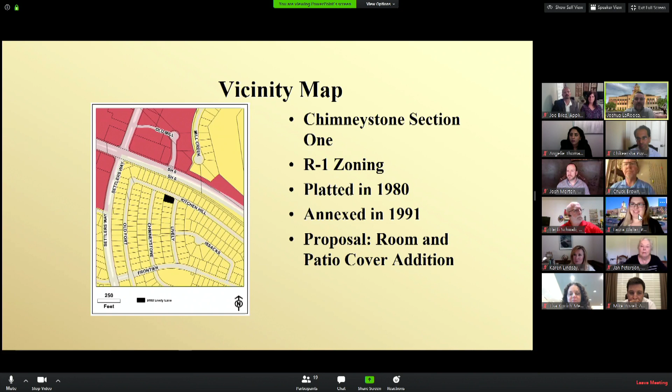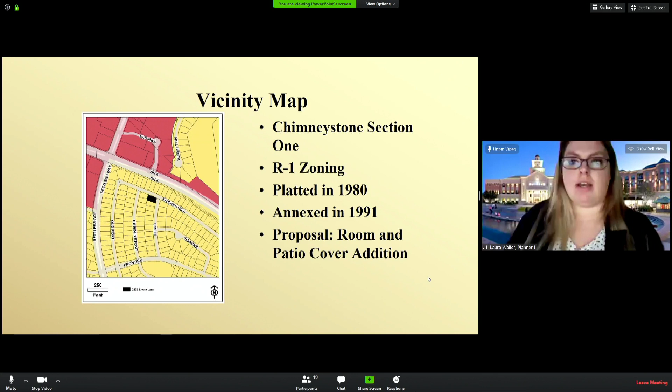Yes. Okay, we're working now. So a little bit of technical difficulties with this different situation, but we're going to start with a special exception. This will be for side and rear lots. We've seen some other special exceptions in this area. It is Chimneystone Section 1 again, and it is currently R1 zoning, but we'll need to come forward for a rezoning to R1Z in the future. Until then, if we get additions, we are taking them through this process in order to get the side yard alignment corrected. So this was platted in 1980 and annexed in 1991. And the proposal is a room and patio cover that would align with the zero lot line portion of the yard. Next slide, please.

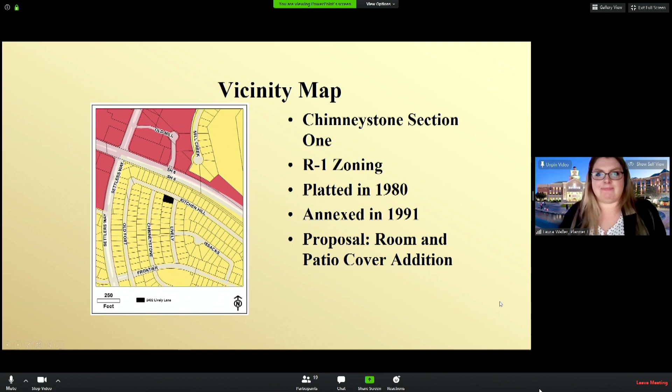So a little bit of an overview: the recorded plat established a 0-foot side on the left, and as part of the zero lot layout, R1 zoning requires 5-foot side yard and 15-foot rear yard. The room addition that would align on the zero lot line side is proposed to extend to 8 feet from the rear property line rather than 15. There is also an existing 10 by 12-foot shed that is encroaching on the street side yard setback. But in order to comply with regulations, the owners have elected to remove that shed so they can move forward with the special exception. So the special exception would allow the addition to be built at the 0 setback and to 8 feet for the rear yard as written by the utility easement on the plat. Next slide.

So this is a site plan of the area. As you can see in the back, there is the 8-foot utility easement. The house is sited on the left side of the lot, and this is a street side corner, so you can see the street side on the right side. There's a dashed square kind of midway up — that is the existing shed that is proposed to be removed, and that will actually be one of the conditions. So there's an additional condition on this site to remove that shed. So this is the plot plan. And next slide.

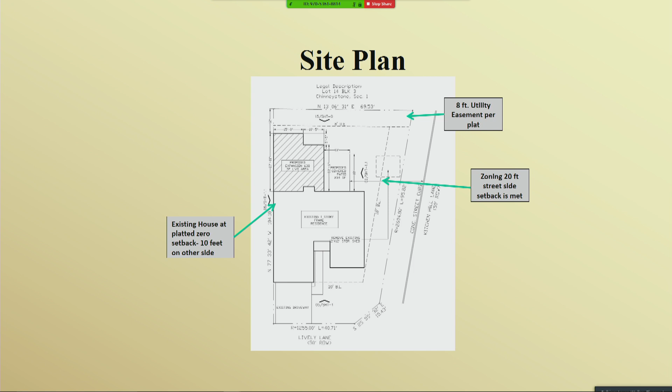Here you can see a couple of elevations. They have proposed to match the siding to what is already in existence. There will be a room addition on the back side, as well as an additional patio cover, all to match what is already there. Next slide.

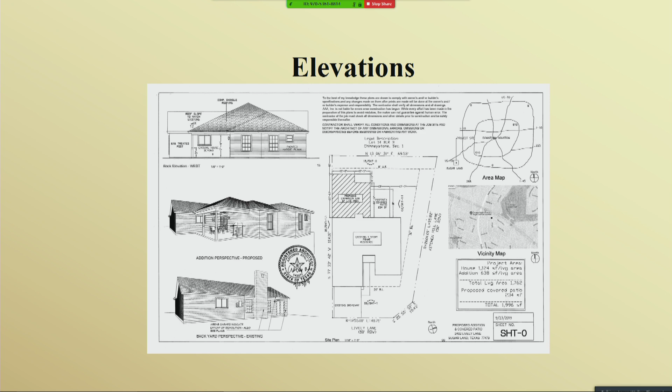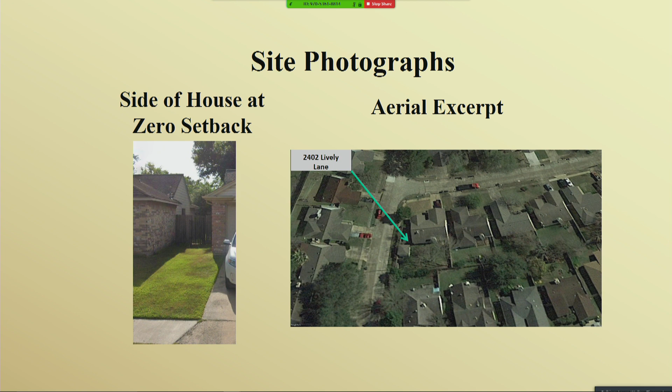Site photographs. This is a view of the home at the 0 lot line side. And then you can see we have a Google excerpt that shows the rear yard of the existing home. So you can see the little shed up on bricks, and then the chimney at the back that will be removed in order to make room for the room addition there at the rear of the house. Next slide.

An aerial analysis of the neighborhood. This does appear to be architecturally compatible with the neighborhood. There are 4 nearby homes that do not appear to meet the 15-foot setback. And as mentioned earlier, every home in the nearby area does not meet that 0 lot line, the 5-foot side setback, because it was incorrectly zoned at the current time.

So there are 7 approved similar special exceptions. You saw one at the last meeting as well as maybe the meeting before that. They're not pictured here in this map because it is part of the larger area, but you have approved 7 similar exceptions. Next slide.

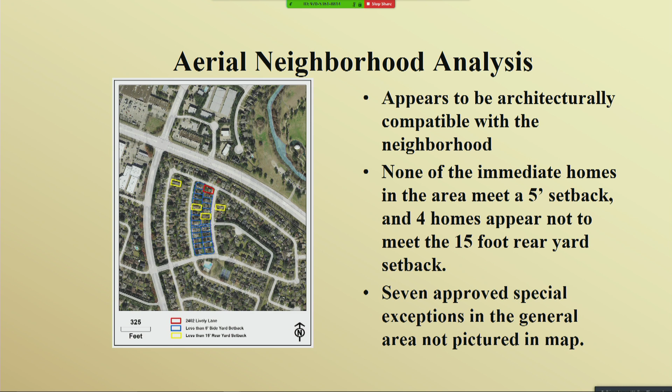This does meet the first 3 standard criteria. It was platted before it was annexed, and the recorded restrictions are less restrictive than the zoning restrictions. And the special exception would not be less restrictive than what was recorded. As far as public welfare, there do not appear to be any issues with detriment or compatibility. Next slide.

The public hearing requirements were all met. Mailers were sent out to property owners. The HOA was notified. There was an online form available, as well as some special circumstances with COVID. We did allow emailed-in forms as well as some extra phone calls. However, we only received 1 general inquiry by phone, and staff is not aware of any opposition. Next slide.

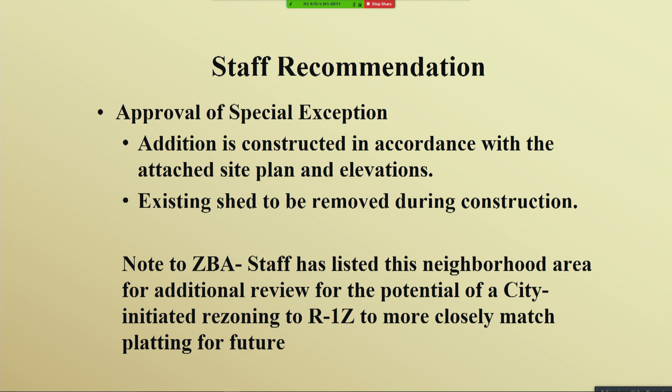Therefore, staff is recommending that the addition be approved as long as it is constructed in accordance with the attached site plan and elevations, and also the condition that the existing shed will be removed during construction. You will now have the public hearing, and there is an applicant representative available to answer any questions from the board after the public comment closes.

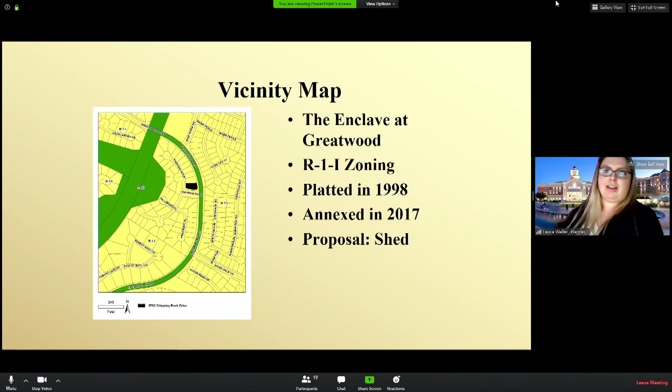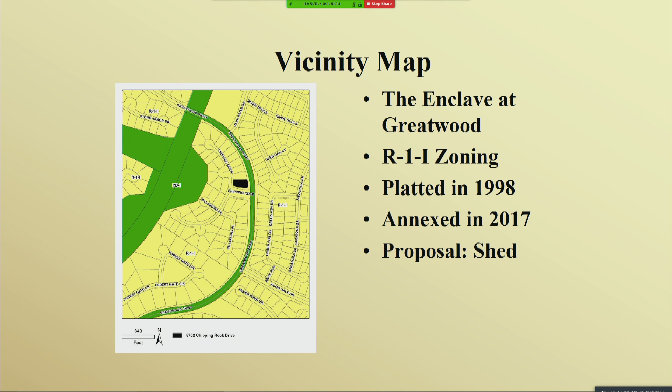Okay, just to make sure that we're all clear, so this is in Greatwood, the Enclave Greatwood specifically. You can see here on the map in black, that is the lot in question. It currently has R1I interim standard zoning, which would require a 5-foot side yard setback. It was platted in 1998 and annexed in 2017, and the proposal is a shed in the side yard.

Next slide. A little overview of the case - this is a little bit different than what we normally see. This applicant actually had to get a special HOA approval in order to be able to put the shed in their side yard. It has since been recorded at Fort Bend in the county clerk, making it the most recent recorded restrictions. So this specific shed, and only this shed, is going to be allowed to be built across that 5-foot line according to the city.

So the shed is proposed to be placed at the side of the house, and it would be 1 foot from the property line and 1 foot from the house, so in between. In order to meet those 1 foot requirements, building safety does require that the shed be firewalled on both of the long sides, the sides that will be only 1 foot from the house. So the special exception would allow this shed addition, only 1 foot from the house, 1 foot from the property line, as allowed by the newly recorded restrictions from the HOA. Next slide.

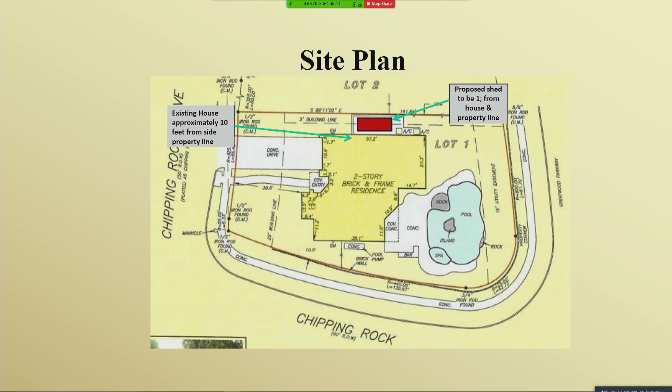So a site plan showing approximately where the shed will be. There is an existing concrete pad on which the shed will be placed. The house is approximately 10 feet from the side property line, and the shed is 8 feet by 16, so it would sit centered about 1 foot from the house and 1 foot from the property line.

Here are the elevations and specifics on what exactly the shed will look like. This is what was the allowed obstruction, and it is recorded with the county clerk's office. So this specific shed and only this shed would be allowed, and it does specifically mention that sides B and D, the long sides, would have to be firewalls.

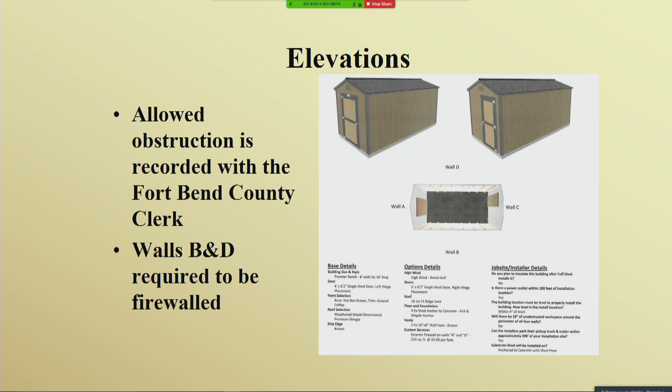Aerial neighborhood analysis. Again, this was taken from Google Images, but you can get a larger picture of the area. We do have nearby homes that meet the 5-foot side yard requirement. None of them appear to be over that 5-foot side yard.

There are 3 approved special exceptions nearby, but again, those are for rear yard setbacks, not side yard. The HOA did require the neighbors to give approval of the shed before the new restrictions could be recorded, so the neighbor would not have an issue with having this shed in the side yard. That was required by the HOA before this even came to the city.

However, there is a question of compatibility because there are no homes nearby that have a shed in the side yard. Any existing sheds nearby are in the rear yard. So that will be up to the board to make that decision on whether it is compatible or not.

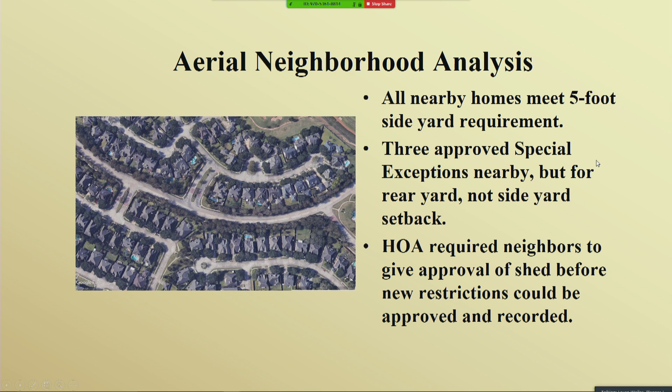It does meet the first 3 special exception criteria. It was platted prior to annexation. The recorded restrictions are less restrictive than zoning, and the special exception would not be less restrictive than what is recorded. As far as detriment to the public welfare, that is up to the board to decide.

City staff did not see any apparent issues. However, you would have to decide amongst yourselves if you think this shed is compatible with the area or not.

The public hearing requirements were all met. It was posted online in a newspaper, and mailers were sent out to property owners as well as the HOA. There was an online form available to provide comments. However, staff received no inquiries and is not aware of any opposition to the special exception.

Therefore, staff does recommend approval of the special exception with the condition that the shed is constructed in accordance with the site plan and elevations that are provided here. Staff and the applicant are available to answer any questions from the board after the public hearing closes.

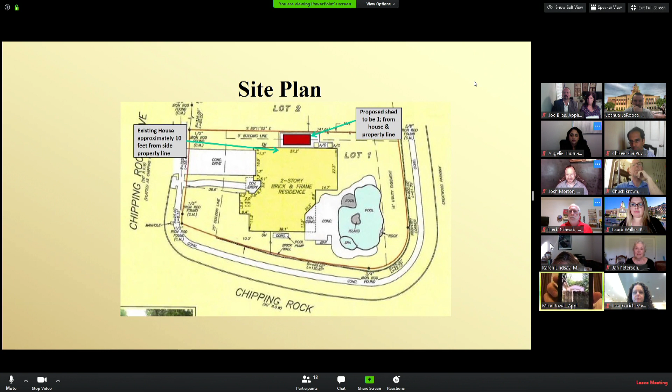That's actually something I proactively brought up to the HOA when trying to get approval on the shed first. I even mentioned I'm willing to do anything they need, whatever the stipulations are, I have no choice but to agree. I said if aesthetics is an issue, I'd be happy to put something in front of it. I don't think it's necessary though, since you only see a small portion over the fence line, and the colors we got approved closely match the house.

There's also an existing tree with a lot of foliage, not an oak, so I really don't see it as an eyesore. I know that's subjective, but I don't see it being an issue. That said, I'm still willing to do that if needed.

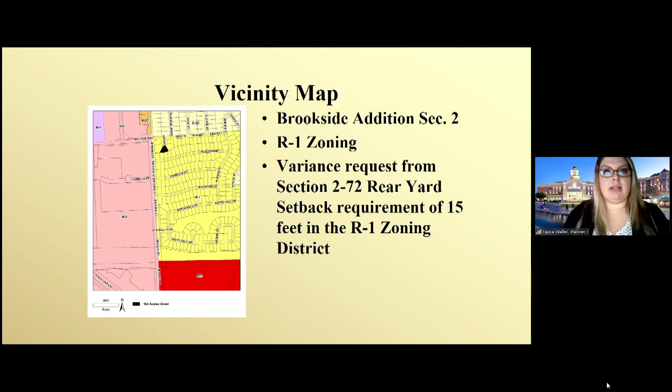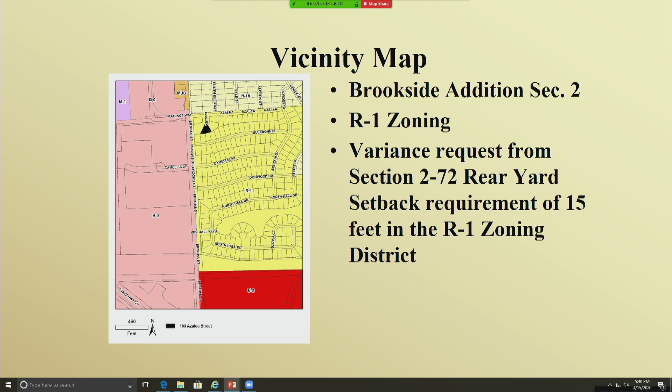To discuss the specifics of this lot, this is part of Old Sugar Land. It was part of the original city limits when it was incorporated in 1959, and was then platted later in 1965. That makes it not eligible for a special exception — it has to go through a variance because of the order in which it was platted. The variance is a request from section 2-72, the rear yard setback requirement of 15 feet in the standard R1 single-family residential zoning.

A case overview: as mentioned, this is located in part of the original city limits of Sugar Land, so it does not qualify for a special exception. The recorded plat established a 10-foot rear yard setback, whereas the zoning setback is 15 feet. The house as it stands meets both setback requirements — it's actually closer to 20 feet from the rear yard. The addition will comply with the platted restriction of 10 feet, but does not meet the 15-foot rear yard setback for zoning. The current 15-foot setback requirement was put in place as early as 1982 and has continued in all subsequent ordinances, even as zoning has changed. It's remained 15 feet.

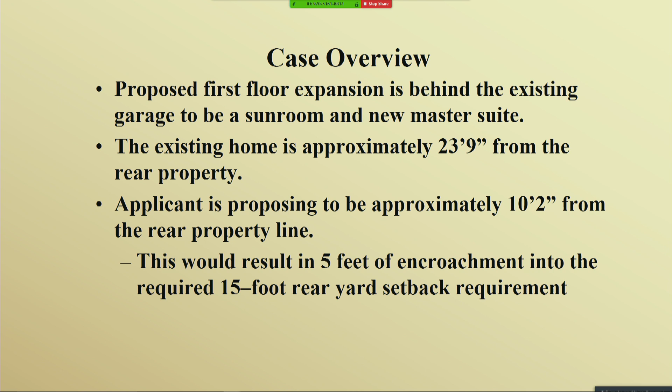The proposed first floor expansion is behind the garage, proposed as a sunroom and a new master suite. The existing home is about 23 feet 9 inches from the rear property, well outside the 15-foot setback. The applicant is proposing to be 10 feet 2 inches from the rear property line, which results in 5 feet of encroachment into the required 15-foot rear yard.

This is a survey of the existing conditions. You can see the house there. It's a fairly large lot, but it's a cul-de-sac lot, so the odd shape is a little different — it meant the house had to be set back 41 feet to fit across properly. But the house as it stands is 23 feet 9 inches from the rear property line.

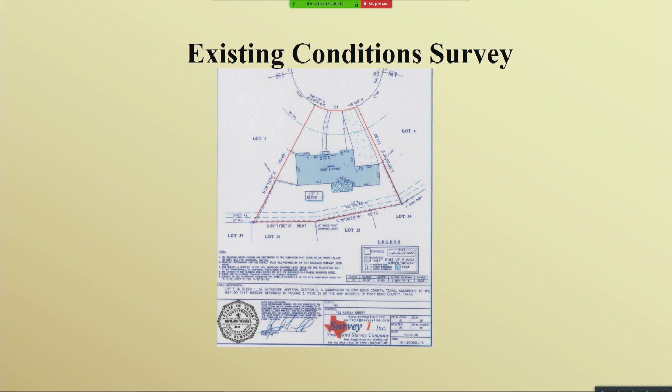This is the proposed plot plan. You can see the existing house in white, and at the bottom on the right side where there are dashes, that's the new addition where the sunroom and master suite will be. On the other side, you can see a different symbol — that's a proposed paver patio and pool that would be there.

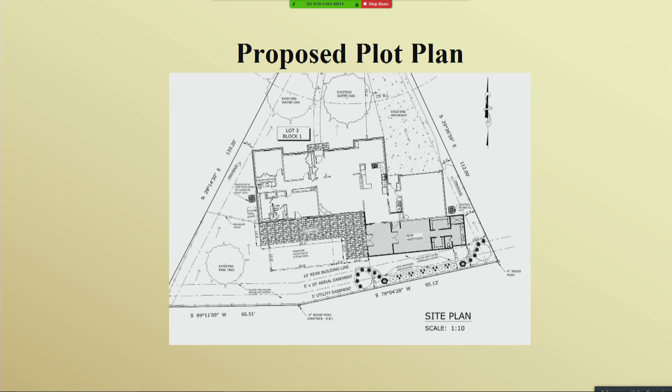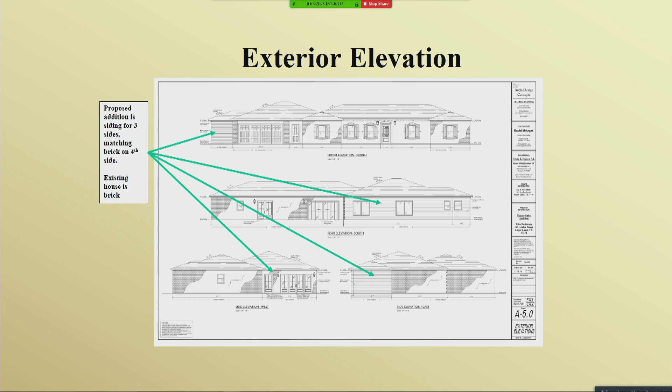These are the exterior elevations. You can see the addition from the front just a little bit on the far left side of the top elevation. The other elevations show the siding proposed is Hardie siding, with brick where the windows are and where you can see it from the pool, but from the street and the rear of the house it would be siding.

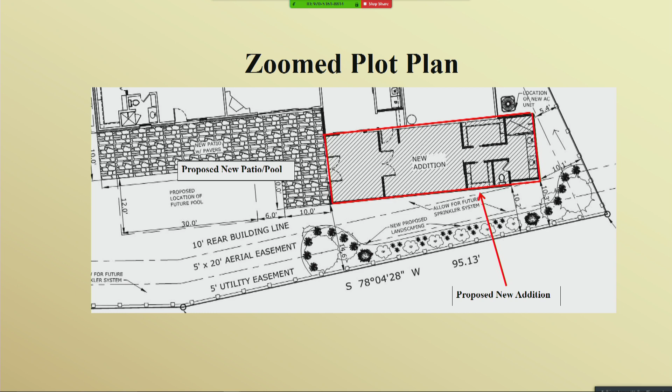So this is a zoom in of the plot plan, just so you can get a better idea of exactly what they're asking. The red box is for the addition, and that is what the variance is for. It is proposed as a new master suite, so a sunroom that would then lead into the master suite off of the kitchen and behind the garage. It would be about 10 feet 2 inches or 10 feet 3 inches, depending on exactly where you measure it from the rear property line. Next slide.

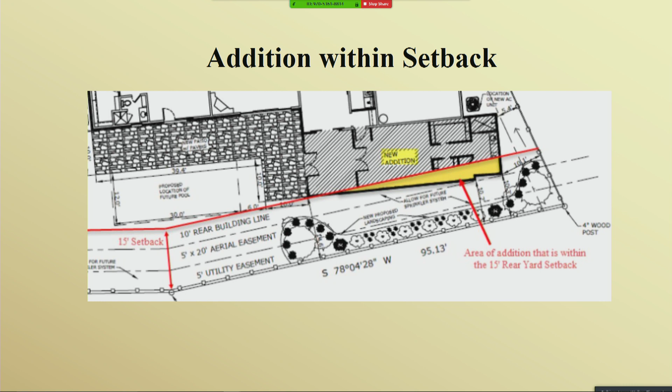This is taken from some material that the applicant did provide from their architect. You can see here in yellow, that is the area that encroaches. It's only about 116 square feet that does encroach, so it's a very small adjustment. I believe it's about 17% of the entire addition that is in the setback. It will be up to the board to decide if they should maybe change their drawing or allow that small encroachment. Next slide.

So some specifics of the case. The addition is proposed to be 663 square feet, and about 116 of that is encroaching. The applicant does believe that special circumstances are the shape of the cul-de-sac lot and the position on that. The house is 41 feet from the front property line, and 25 feet is the required setback by plat. So that is 16 feet further than would be required.

However, I did do some math and some research, and the average depth of the lot, if you take off that front 16 extra feet, would still meet the 110 foot minimum depth. So even if you take off that extra 16 feet that the house is set back and is maybe considered wasted space, it would still meet all of the setbacks and size minimums of the lot for the R1 district. This extra front yard that is buildable area, but is also wasted because it is in the front yard rather than the rear, is about 885 square feet, or 7.49% of the entire lot. So it's not a very large portion of this lot that is wasted there in front of the house. Next slide.

So this is the form and the measurements that I took using the scale and some of our renderings that were given to us. This came from the survey and then using the scale from the survey. You can see that front portion there along the curve that says 885 SF, that's square footage — that was what I was considering the wasted space. Then I measured 25 feet from the front of the house out, so that would be the new front curve, because the house does have a 25-foot build line that was platted. I took the measurements from either side from that 25-foot-in-front-of-the-house measurement, and it does still average out to be exactly 110 linear feet of depth of the lot. Next slide.

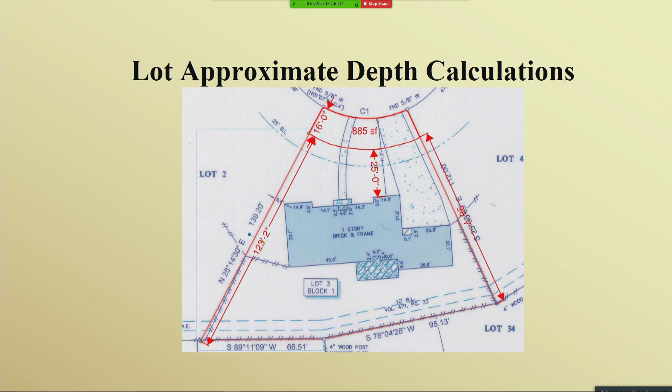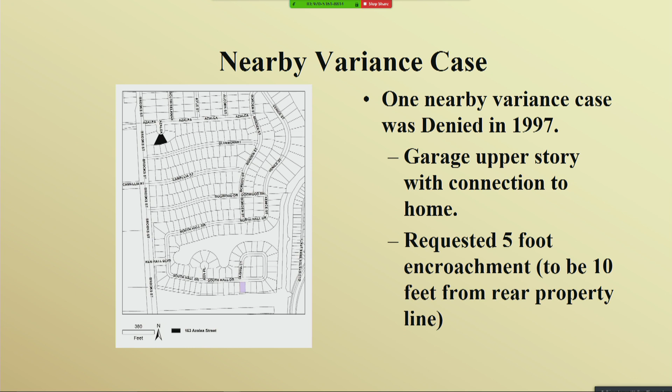There is a nearby variance case. It's similar in that they requested a 5-foot encroachment so that they could be 10 feet from the property line. However, the lot layout for this was different. The garage existed at 10 feet from the property line, and they were requesting to build a second floor above the garage and then connect that to the home, so that the garage and this new portion of the house would be encroaching into that 15-foot setback. It was denied in 1997. Next slide.

So the public hearing requirements were met. There was an online form available to provide comments in advance of the meeting. We did receive one of those earlier today, so that will be read during the public comment period. Aside from that, no other inquiries were received, and staff is not aware of any opposition to this variance request. Next slide.

So the variance criteria: in order to grant a variance, the board will have to have a unanimous vote because there are only 4 members since Joshua had to recuse himself. So they will need to find that the variance is not contrary to the public interest, that there are special circumstances or conditions that apply to the land or building for which the variance is sought, that literal enforcement does result in an unnecessary hardship, and that if granted, the spirit of the ordinance is observed and substantial justice is done. Next slide.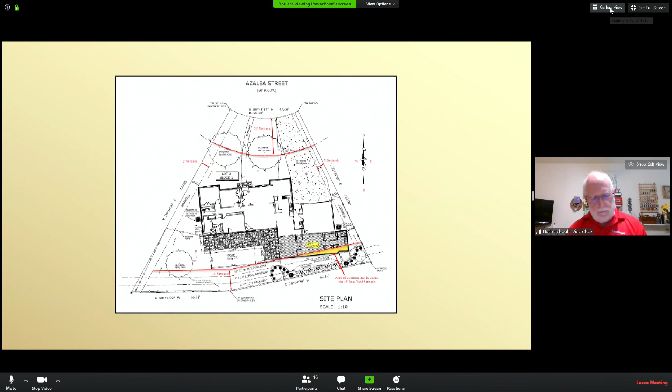So this will be presented by the applicant. I would like to introduce them, and then they will need to be sworn in before they can give their presentation in the following slides. So Mr. Biles? Yeah, ready to be sworn in. Okay, Mr. Biles, do you solemnly swear or affirm to tell the...

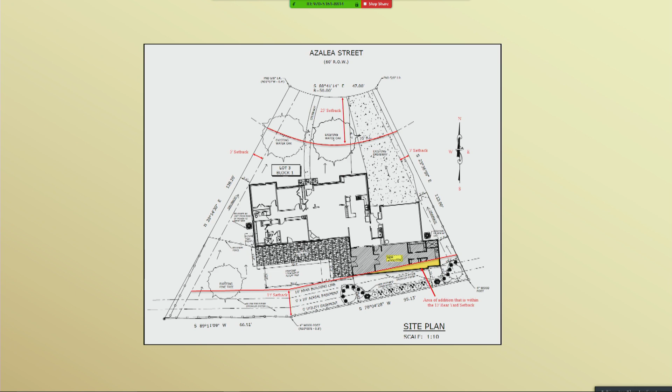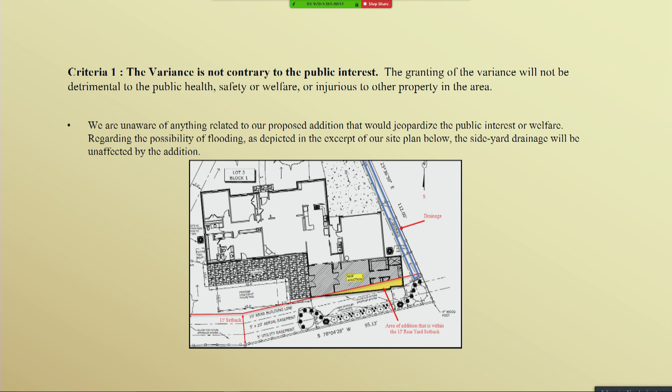So I read ahead and found out the 4 criteria to meet, and I'd like to address each one of those. The first criteria is the variance is not contrary to the public interest. We've been kind of racking our brain as to how this would be contrary to the public interest. The only thing we come up with is possibly flooding. We assured that we are going to get gutters, and we're going to direct the water down our driveway or the designated drainage area as you see in our plat map there. So you can go to the next slide.

The second criteria, there are special circumstances or conditions applying to the land or the building for which the variance is sought. We believe we meet both the special conditions to the land or the lot size and special considerations to the building as well. Regarding the special conditions to the land of the lot first, you can see right there the area, 4 or 5 blocks surrounding our home. We are the only cul-de-sac in those neighborhoods represented there.

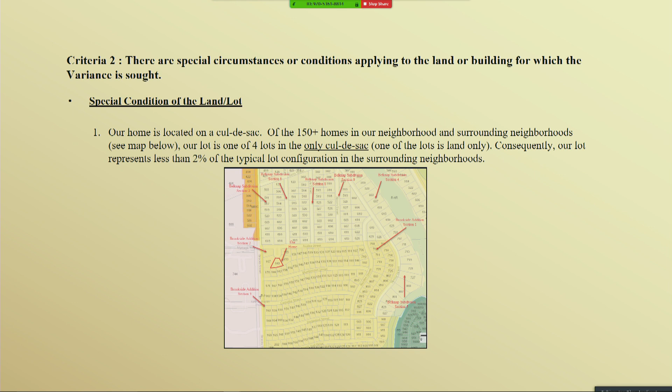On the cul-de-sac, there are approximately 5 homes. Technically, one home actually faces Azalea Street, so I question whether it's truly on the cul-de-sac. There are really 4 homes that have the odd-shaped lot symbolic of cul-de-sac lots. Taking all these homes into consideration, it's a very unique situation being on a cul-de-sac, and taking all those neighborhoods into account, it represents about 2% of the typical lot in those areas.

As Laura mentioned, we do have a 25-foot setback from the street, but there's special consideration. Even in this case, the writers of the law recognize that cul-de-sacs are unique, so they granted a 20-foot setback that the buildings need to be backed up against.

My primary issue is that because the home wasn't able to be built further up, you can see highlighted in both corners the 5-foot setbacks on the current building. It really squeezes our backyard, and you'll see this in a future map. Even though the backyard is long, it's very narrow, and that comes into play when we were drafting these designs.

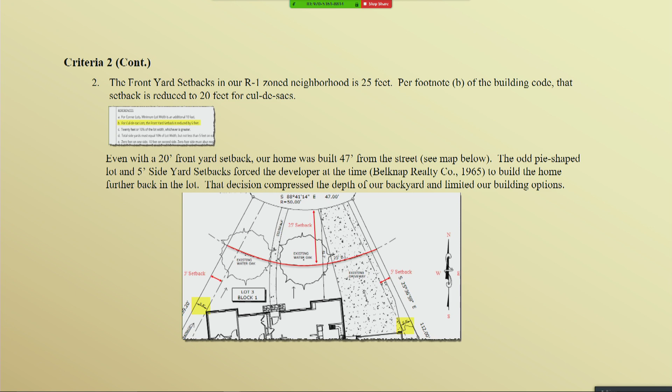When we walked around with the architect, she gave us various options for where we could locate our bedroom. One option, which I'll talk about more later, was to move the garage up, which would allow a wider, larger bedroom outside the setback area.

The problem with that, as I mentioned before, is that we're constrained by this pie-shaped cul-de-sac. We can't move the garage up because we'd be encroaching into that 5-foot setback. I had thrown out the idea of angling it, but the architect said angling it wouldn't look good from the street, would be aesthetically poor, and would also be much more expensive because of the different roof lines.

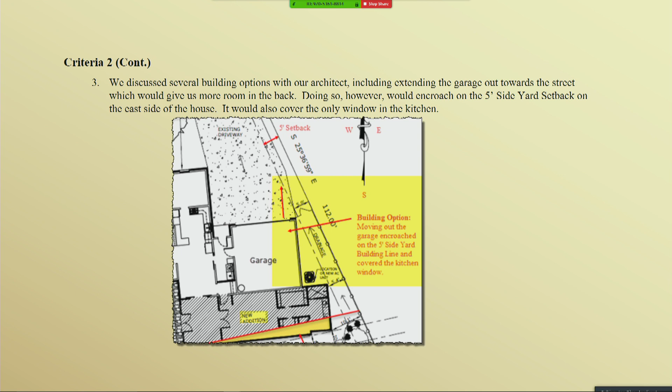There's also a side door there - you can't quite see it, it's not labeled in that picture, but it's just outside the kitchen on the left-hand side of that drawing, with a window above the kitchen sink, very common to most kitchens. By moving that garage up, we would be blocking that window. So that was not an option for us.

So that was talking about the special conditions for the land or the lot. I'd like to address special conditions of the building itself.

Again, talking to the architect who showed us various options, the only other two options were to build into the southwest corner of the lot. You can see it there in that excerpt where the existing pine tree would be.

There are significant problems with that. In order to access that room, as highlighted in that picture, we would have to tear down the existing guest bathroom. Considering this is a small house, that's the only guest bathroom we have, so we'd have to relocate it, which would be a lot more expensive than our current plans - cost prohibitive.

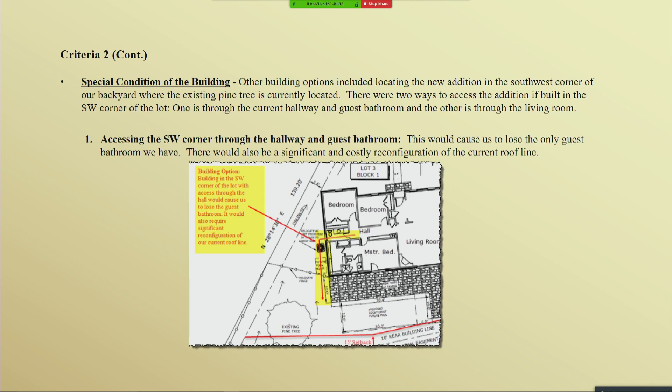The other option, building again in the southwest corner, is to access that room or the proposed master bedroom from our living room. We do have a chimney there, so she said we would need to remove it, which we don't want to do. We'd have to exit, put in a door, and turn that sharp 90-degree corner as highlighted.

The problem with having a hallway there is we would isolate what is currently the master bedroom. There's a window - I know it looks like there's a door there, but that's a proposed door; currently there's a window. We'd have to block off that window, and also block off the window in the master bathroom. It would also require extensive reconstruction of the current roof line, which we'd have to widen - again, cost prohibitive.

There was also another issue our architect brought up: isolating this bedroom, meaning shutting off all windows in the bedroom and bathroom, would cause a fire hazard. She suggested we might have trouble permitting that. Permitting is one issue; the second issue is we would prefer not to have a fire hazard in what is hopefully going to be our guest bedroom in the future.

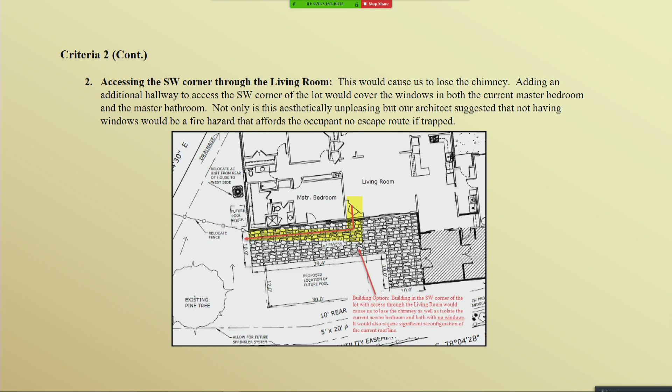So the third criteria is, a literal enforcement of the ordinance would result in unnecessary hardship. This house is in Belknap Brookside subdivision, which is a designated historic subdivision. Our house was built in 1965. We love it, it's an old historic house. We would like to maintain as much of the current floor plan as possible, so the idea of tearing up bathrooms, blocking in bedrooms, getting rid of windows, extending the roof lines, it's not conducive to trying to maintain the current historic value of the home. So doing so, we believe, would be unnecessary hardship.

Then that last bullet point, I referenced the fact that the proposed addition is $185,000. Any significant additions to that southwest corner of our lot that I mentioned would be above and beyond that, so we're pricing ourselves honestly out of the addition. We're already right at our peak at 185. And I know I read the laws of the presentation, I know you don't exclusively consider budget, but then again, you also can't ignore it either. So it is one bullet point that I want to bring out.

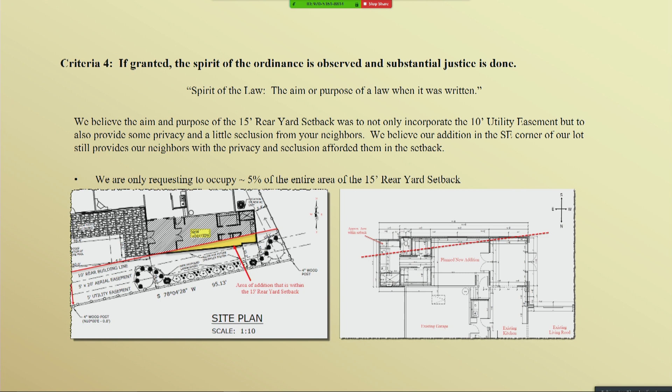So to be honest with you, I don't know if this is the last slide or if there's one more, but if you want to click it. Okay, so I think that's the last slide.

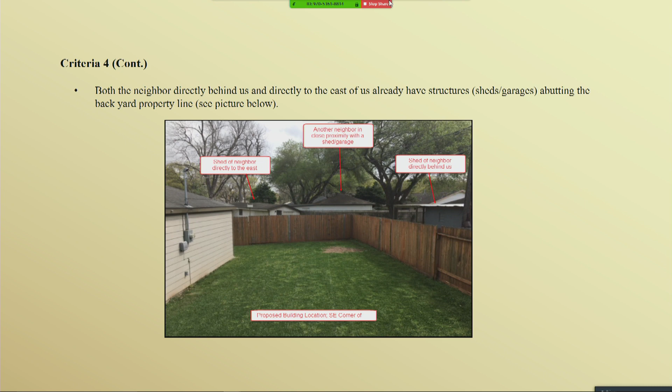I think the only thing I would like to add is, of course, we have looked at all options of this construction. One of the main reasons we felt it was necessary to build behind the garage on that portion of the yard is it's close to the garage, close to the laundry room, close to the kitchen and the living room.

If we had to build on the other side of our lot, as we get older, we're even looking at something called age in place, things you put in place in new construction. But as we get older, it would be on the other side of our property completely, going from one end of the house to the other just to get to the kitchen or the living room.

So to me, it was nice to even have that option to think we would be all on one side of the house for when our children are out, which is not too far away. One is already out, one to go. It would be a nice option to not have to use the side of our house that currently has our bedrooms and only bathrooms. Building on the side of the house behind the garage also offers yet another bathroom for this side, seeing that it is a plantation style home.

I'd also like to add that building in the back of our garage is exactly where the electrical lines come in and exactly where the gas lines come in. So we wouldn't have to repipe or rerun lines to the completely opposite end of our house. From a practical standpoint, it just made more sense to put it behind the garage where it's currently planned. Well, I think that's it.

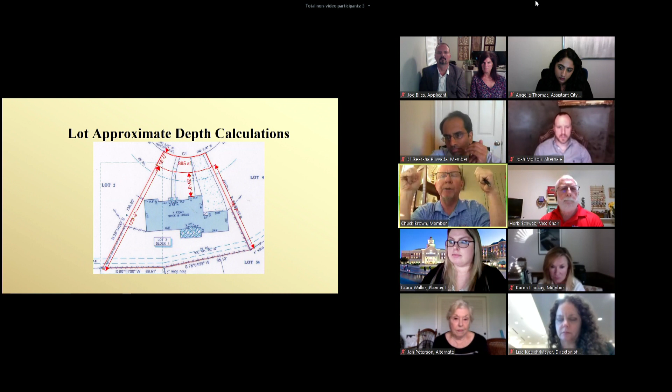Let me ask this, if you don't mind. If you look at that one slide where the front corners of the house were touching the setback lines from the side properties, that was 5 feet, was it not? Yes. Okay, so I look at the special exception as having more to do with the placement of that particular structure on that particular piece of land, not necessarily because it's a cul-de-sac, but because of where that building got placed, it has created the special exception for that setback in the back.

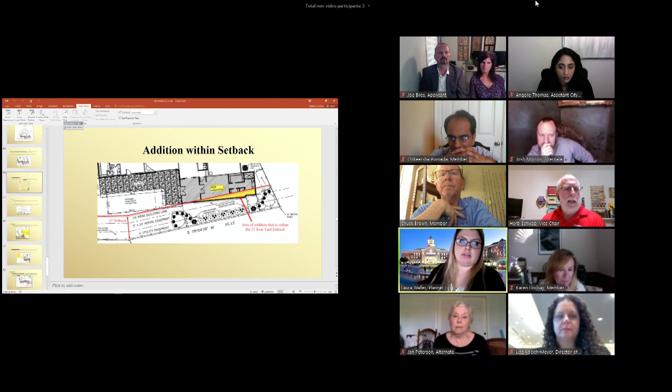Again, that's Slide 50, or 51, sorry, should have the measurement you're looking for. It could be the building itself, yes. So I'm looking at it from my standpoint of not necessarily because it's a cul-de-sac, but because of where that building is positioned, it's creating, in my mind, a special circumstance for that setback issue. It is noted at 41 feet 2 inches from the front property line.

But the lot itself doesn't have anything special to it. Just because the building is put there, I mean, our main concern is the lot. The unique lot or the building? For criteria number 2, it could be the lot or the building. It could be either, correct? Okay, all right.

But again, if we do say that that lot is, well, the lot or the building, does it have to be both the lot and the building? It's or, either one. And if I'm incorrect, Angelic, please correct me, but I believe it's or. Yeah, you're correct. It's or. It's either the lot, the land, or the building.

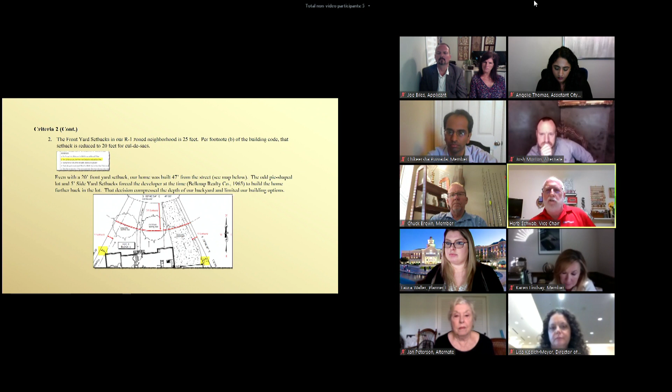I'm worried about a precedence here. They could use it as the argument, yes. And what worries me about that precedence is that if we do this, then we're basically avoiding, we're going around the Planning and Zoning Commission, we're going around the zoning process, we're going around the public hearings for zoning, and we're rewriting that ordinance.

Well, it would be just for this lot, or each lot that you would have to approve individually. But once we've approved it, then that precedent is set.

Well, is it set, or is it just, can someone just bring that up in discussion? In other words, because we approve this 4 foot or 3 feet encroachment, it doesn't necessarily open it up, make it a new rule, does it? I think it does. And Angelic? No, you're correct, Mr. Brown. You can look at it, and you still have to make the determination as these cases come before you. But that homeowner could bring it up before you and say, well, you granted it here, and so it would be another thing they could use in support of their case.

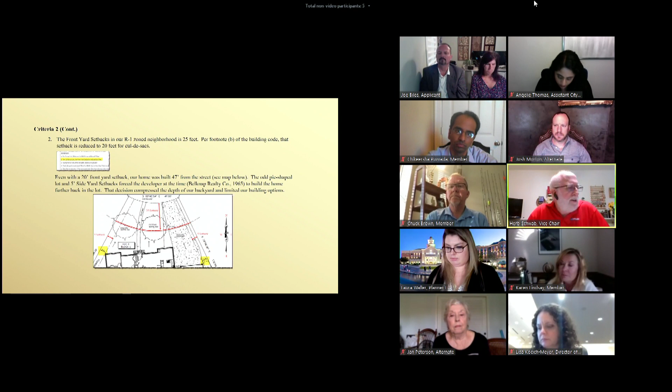Okay, does anybody else have any discussion on the second criteria? Okay, the third criteria: a literal enforcement of the ordinance would result in an unnecessary hardship. Again, this requires discussion on the board.

Any discussion? I think we've discussed. I've said what I felt, what my opinion was on this. So, fellow board members, I mean, if I'm honest, I don't see the hardship. I understand that if they don't do it this way and they want to do it another way, it'll cost them more money, but they don't have to do the addition. I didn't hear anything that says the addition is absolutely required or the space becomes unlivable.

I agree with you, Mr. Puvvada. I think that there are other options. They may not be what is most desirable by the homeowner, but we're not depriving them of the use of the rest of the house or the property. I don't see the hardship either. I agree.

Okay, and you've got that down, Ms. Thomas? Yes. Let's go on to the fourth criteria.